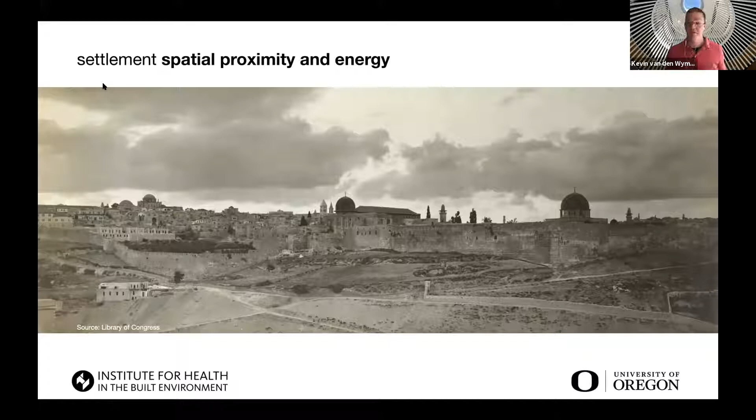And I just also want to do a quick flashback to what I call the 100-year flu. I would say COVID is the 100-year flu, right? We design buildings around 100-year floods, but maybe we need to start thinking about designing buildings around the 100-year flu.

And while I think we all recognize that it is going to transform architecture, I think the question will be, how long and lasting are those ramifications? And reconfiguring office spaces around 6-foot circles, I think there's a lot more to it than that. And I hope we will learn something from this pandemic. And with the technology and awareness that we have today as compared to 100 years ago, I really hope we'll be leveling up and talking about a new generation, really a new version of a healthy buildings future.

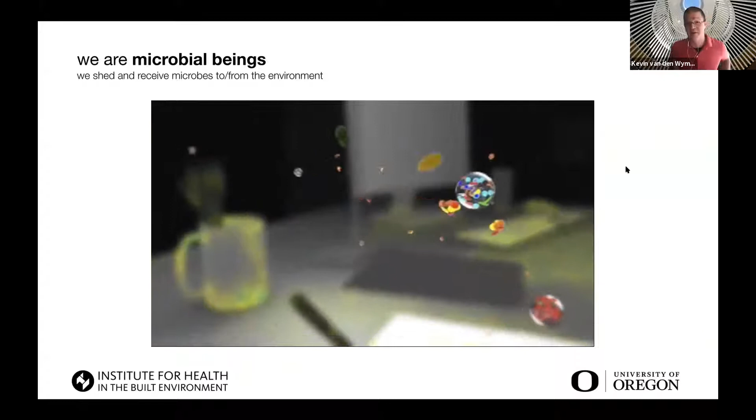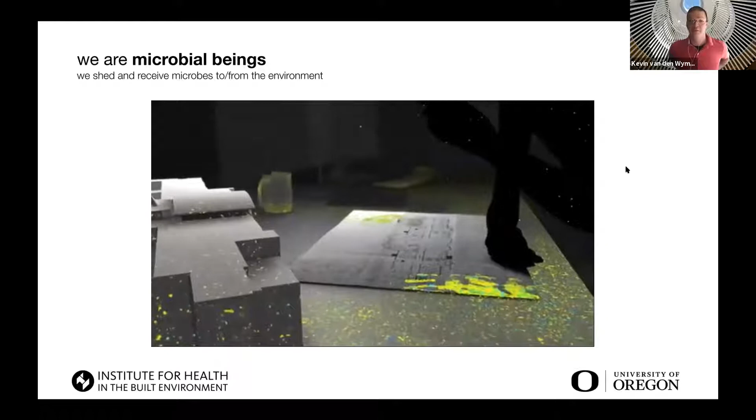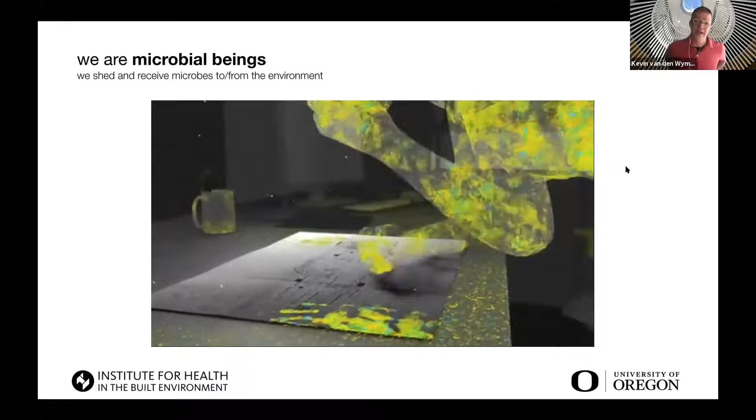So first, just to put this in context, we've been studying microbes in buildings. The center has, for a decade, with the Alfred P. Sloan Foundation. Since I joined the lab 5 years ago, I've also been heavily involved in this indoor microbiome research. You're probably familiar with your gut microbes, and you understand those are often really helpful for you. If you take antibiotics, your doctor might prescribe probiotic yogurts to help replenish them, because they support human health, digestion, and mood. There's a concept called the gut-brain axis, which shows that gut microbes might implicate mood, mental well-being, and recovery from stress events.

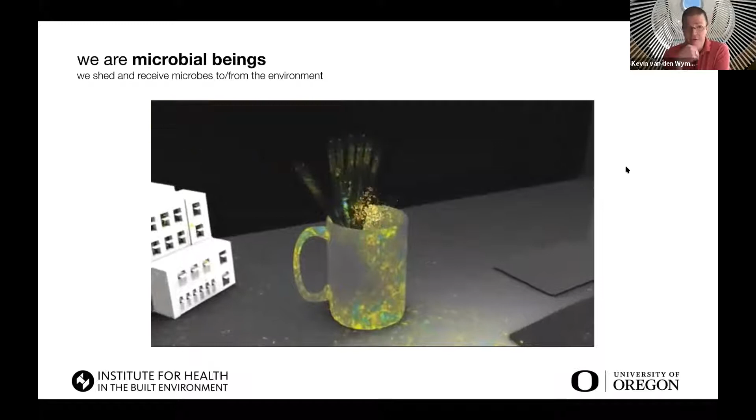The other thing to recognize with these colors smattering everywhere is that we are depositing microbes into the building, and the building is bringing in microbes of its own, depending on its ventilation pathways and the material choices we make when we construct the building in the first place.

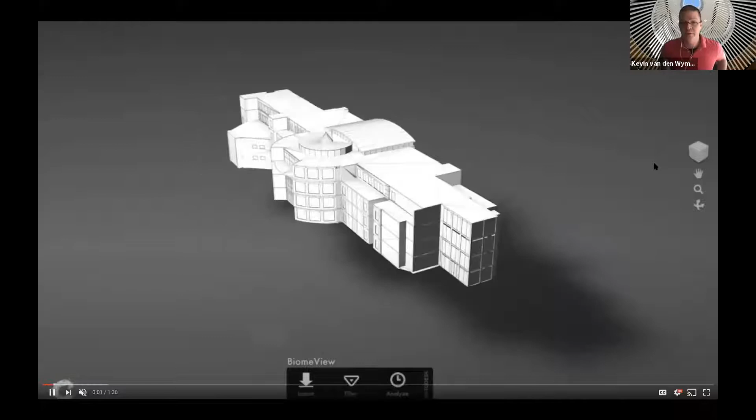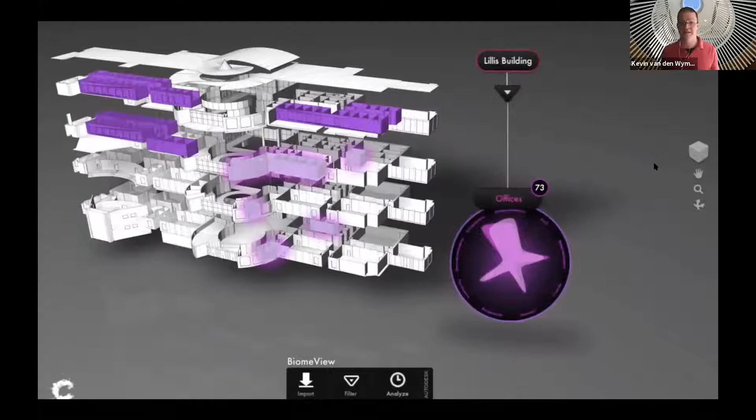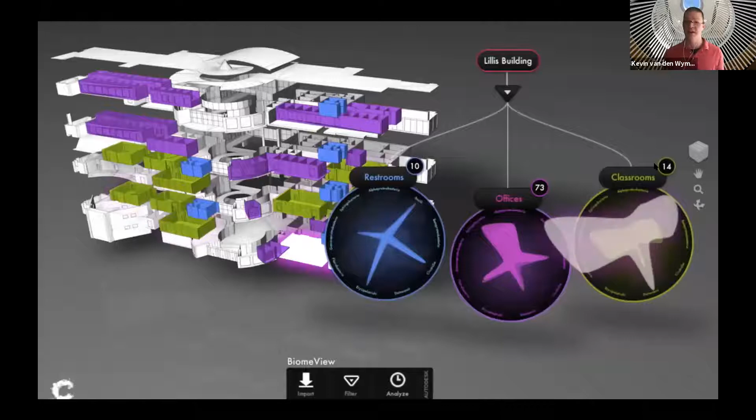What this shows is a research project that completed just as I was coming here to Oregon. Years ago, the Energy Studies Lab worked with local architects SRG on the Lillis Business Complex. It was built in 2002, and the lab had an intimate relationship with it. So not surprisingly, when the opportunity from the Sloan Foundation came to study microbes, we started with this building. We learned that each building type had a distinct microbial signature, and each room type within each building also has a unique microbial signature.

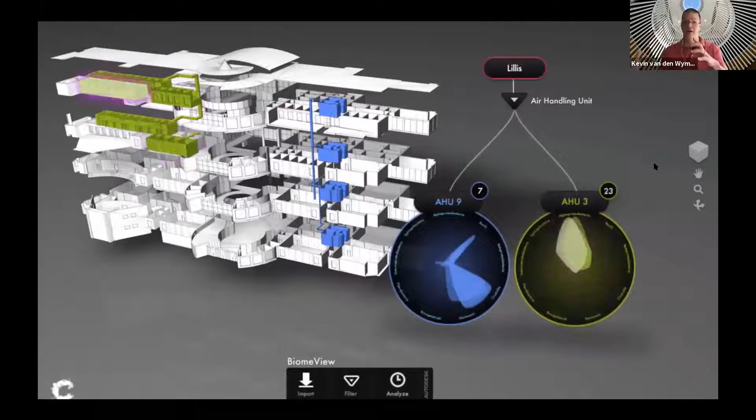These are called spider plots, where we take different taxa of bacteria and plot them around, showing how air handlers from one side of the building have a different microbiome than air handlers from the other side. Offices that are nearer to one another have microbiomes that look more similar than offices that are further away. So you take that to: what can we do from a building operations standpoint?

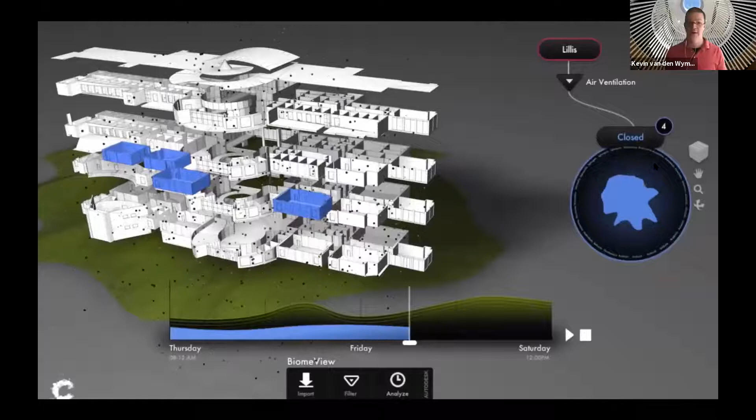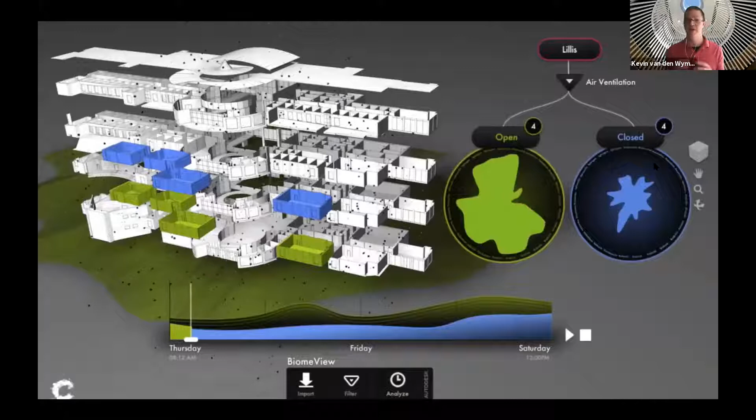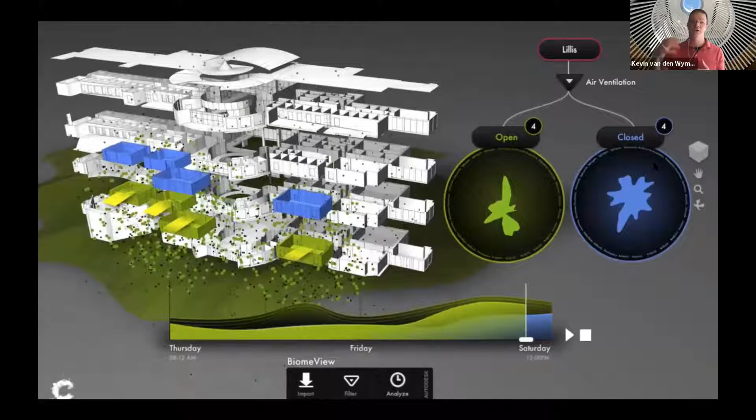Here we're showing that a mechanically ventilated ducted airway, compared to a naturally ventilated, outdoor and night-flushed space, creates really different abundances of microbes, as well as different microbial signatures. The spider plots look different, and the outdoor microbiome had a much greater concentration of outdoor-associated microbes, while the blue spider plot shows a higher concentration of human-associated microbes. That's a clue as to potential pathogenicity of the microbial community structure in those two different rooms.

We don't know why, but I have some hypotheses—maybe it's around the idea that the solution to pollution is dilution, and we're getting more outside air when delivering it through passive ventilation, especially night flush cooling, than in a classroom that has minimum outside air requirements when the room is unoccupied, for example.

Okay, so that's the platform. Enter February 2020 and the novel coronavirus.

We sprang into action and said, look, if the Biology and the Built Environment Center doesn't write a guidance document as quickly as possible, then who will? I'm proud to say that the ASHRAE Epidemic Task Force, as far as I'm aware, reviewed this as the first paper when they were starting their guidance documents. We've had many hours of interesting conversations over the last several months, and it's been a really interesting collaboration to bring architecture, microbiology, building science, and building engineering together to support guidance documents from ASHRAE as well as from AIA.

In this paper we make several recommendations, but three that really stick out and are relevant to this topic today are outside air fraction, air change rate or air exchange rate, and filtration. If you read the ASHRAE Epidemic Task Force guidance, those are three really fundamental principles.

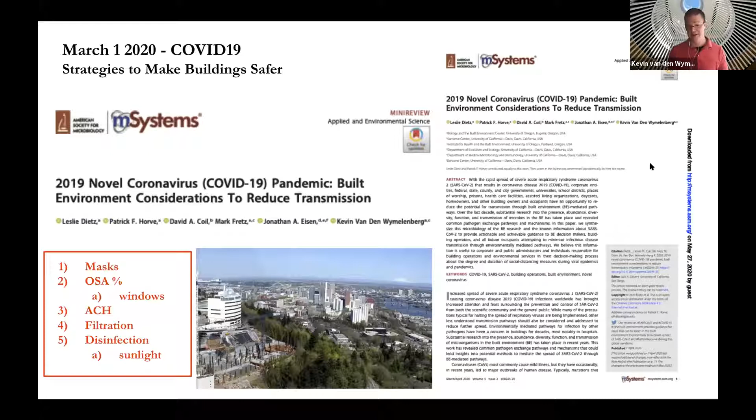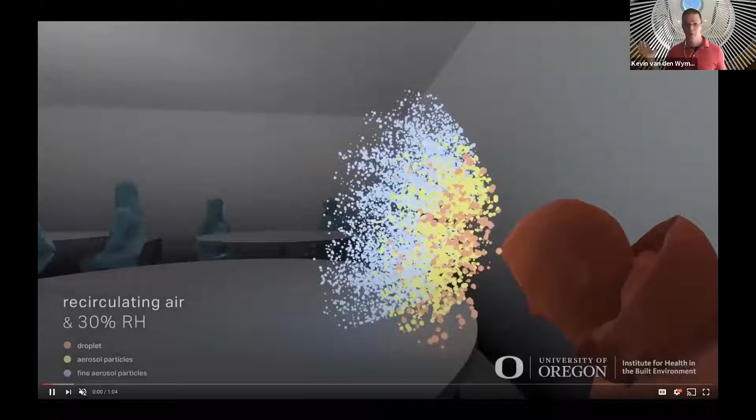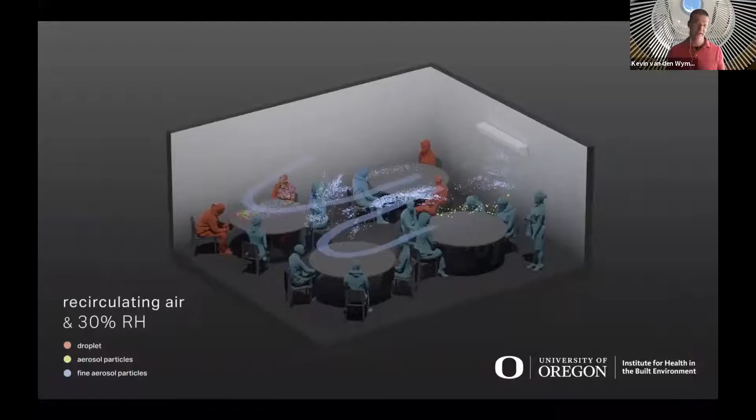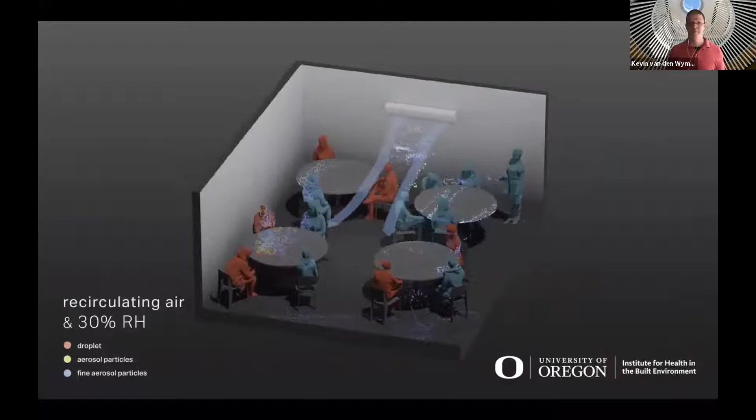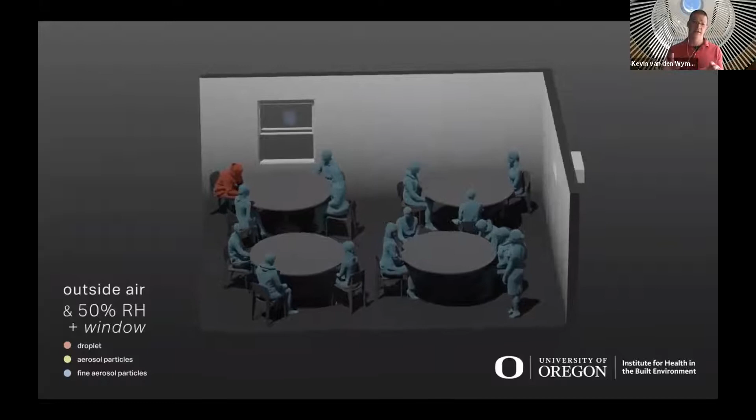We know it can be caught up in globules that are less than 1 micron. Less than 1 micron particles can fly around the air. And there's even research to show that ultrafine particles can remain aerosolized and infectious in a perfect environment for more than 16 hours, for up to and more than 16 hours, right? And so the whole idea with this was just trying to say, look, wherever you come down on that spectrum, from a particle physics standpoint,

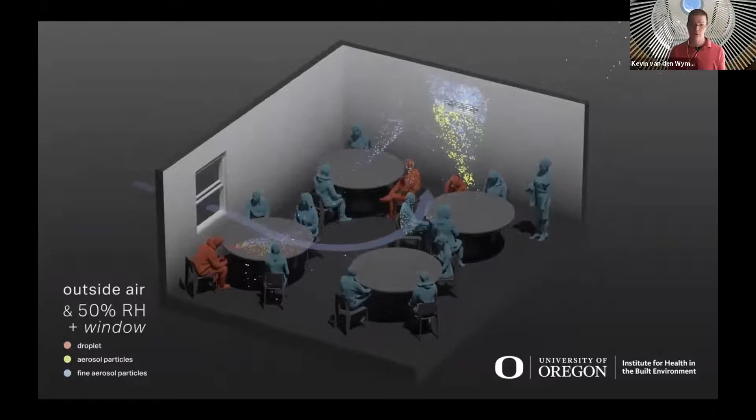it's hard to deny that particles could remain aerosolized for some period of time, get caught up in air streams, and fly more than 6 feet. And that there are things that we can do about it. And here in this case, we're just simply showing 2 simple concepts, maybe 3. Increase outside air exchange, in this case through a window, exhaust air, so once-through air as opposed to recirculation.

And then the third being, when you do introduce outside air, oftentimes, depending on the weather, you might have increased relative humidity. And there's kind of a trifecta related to relative humidity that is pretty interesting.

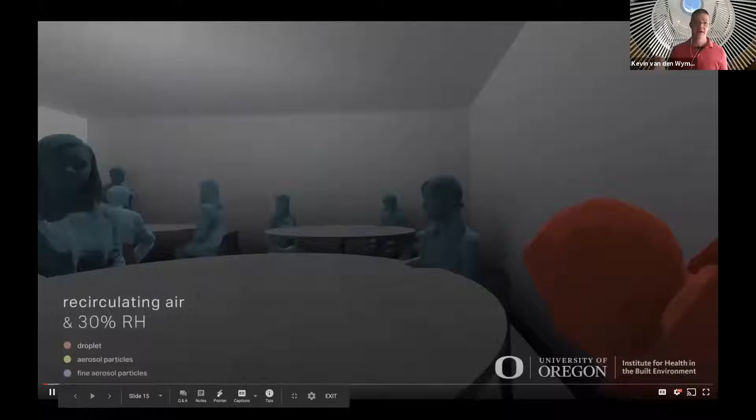One is that increased water content in aerosols means that those aerosols will fall out of the air more quickly. So here you can see the ultrafine aerosols are the blue, and with more humidity, especially those will become heavier and will fall out of the air more quickly, so you're less likely to breathe them in.

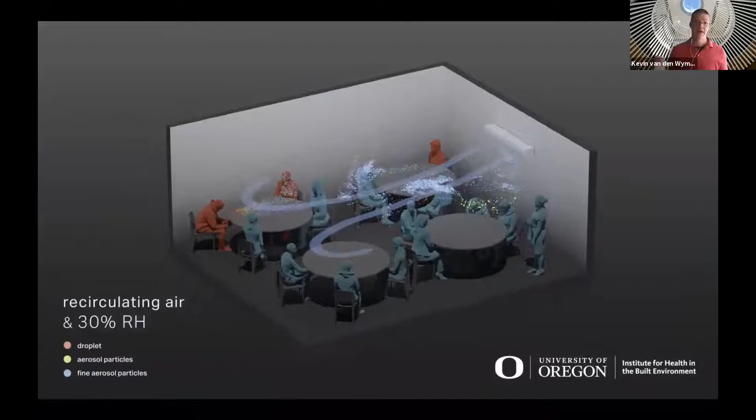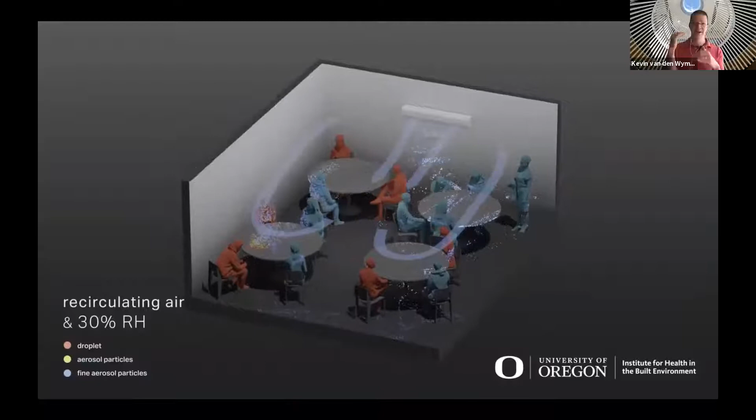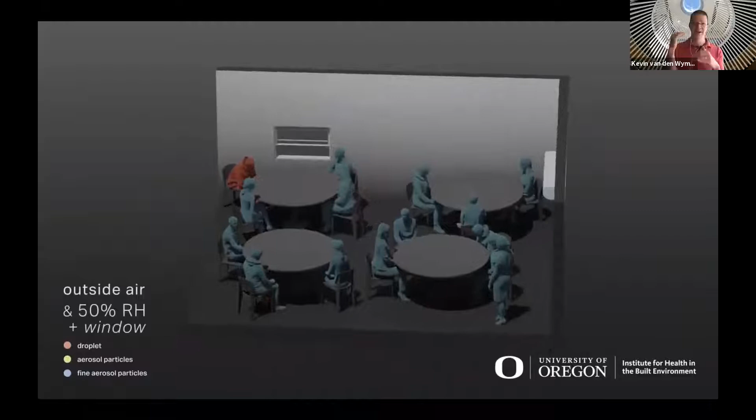The second is that mid-range humidity from 40 to 60% has been shown to be supportive of human immune function. And if you just think of this, if you've gone on an airplane, the air is really, really dry, you come out and your mucous membranes might be cracked and more likely to create structure for a pathogen to take hold, drying out the natural ciliary action that can happen as a natural preventative measure from our immune system.

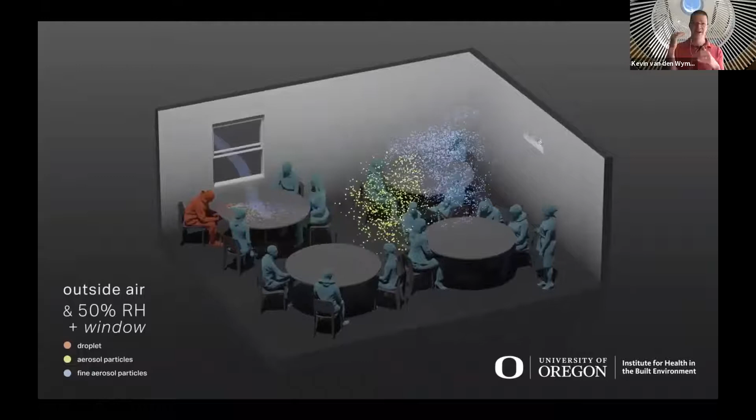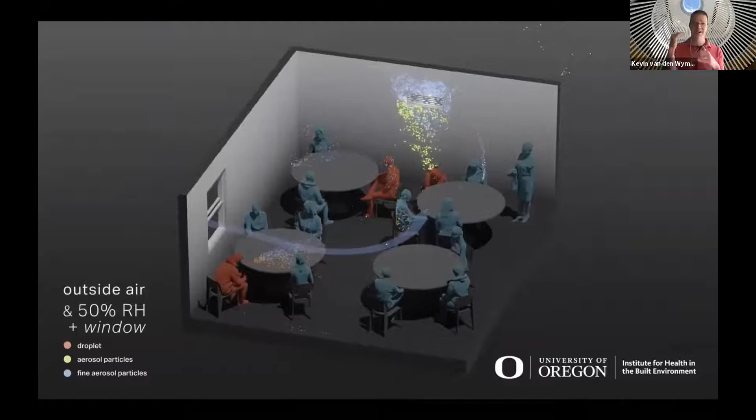And then the third thing in the trifecta would be that increased humidity from 40 to 60% has been shown to more rapidly inactivate virus particles. In particular, there's a lot of research on influenza, but there is some emerging research on the novel coronavirus as well. And in general, it's fairly well accepted that mid-range humidity can more quickly inactivate influenza especially.

Okay, so we've got some problems, but there are some things we can do about them, right?

Well, we want to bring data to that equation. We had been studying with our hospital partner at Oregon Health and Science University for several years before the coronavirus pandemic, looking at other pathogens. Two in particular, two bacteria: one called Pseudomonas aeruginosa and the other called Clostridioides difficile, or C. diff. Most folks have probably heard of C. diff. It's a gut bacteria that causes pretty bad diarrhea, and in its worst case, you can have large sections of your bowels that have to be removed because they become irreparable. It's absolutely dreadful, has long-term consequences if you survive, and it actually kills about 8% of the people who acquire it. So we had been already studying different pathogens in the hospital environment.

Insurance companies often don't make payments associated with what they determine was a hospital-acquired infection. So if they can say they think the patient acquired it within the hospital, they can refuse payment, depending on your provider and your terms, of course.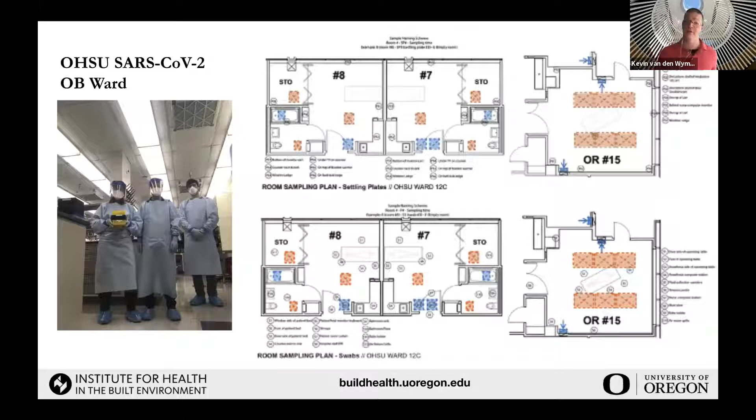So the fact that they were willing to let me, let us, participate and actually fully collaborate in the research is just amazing. And I think this hospital, because they're taking such a proactive approach in testing their spaces for the presence of this genetic material associated with this virus, is likely the safest hospital, or one of the safest hospitals to go to.

So really the surface swab is a time-integrated signal of anything that might have deposited in that space since the last time that surface had been wiped or cleaned. And the dish is a known shorter period of time, usually just an hour or two, as we're walking around putting dishes out into multiple rooms, and then coming back an hour or two later to collect them.

And here you can see this particular room had two locations that showed the presence of the virus. I want to take a moment to explain that. So the presence of the virus—what I really should say is the presence of the genetic material, or very specifically the RNA. If you're used to hearing DNA, it's a similar concept; it's just that this particular virus is an RNA virus. So we're using that genetic signal to detect the presence of the virus.

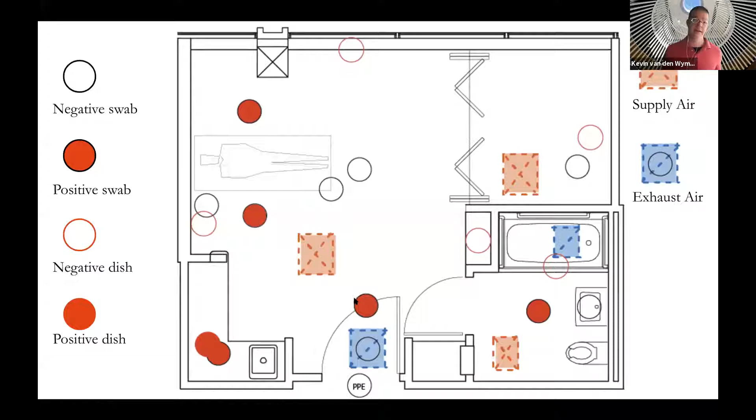And then finally, the operating room. And here, this is sort of the cleanest of the clean, if you will. 20 to 25 air changes per hour, MERV 15 filtration. And this part of the year was quite mild. Studies were collected in April, quite mild outdoors in Portland, and we had a really high outside air fraction. So kind of the best of the best of the best. Higher than even ASHRAE recommendations for hospital settings and the new ASHRAE Epidemic Task Force guidance, which is recommending MERV 13 for commercial buildings if possible.

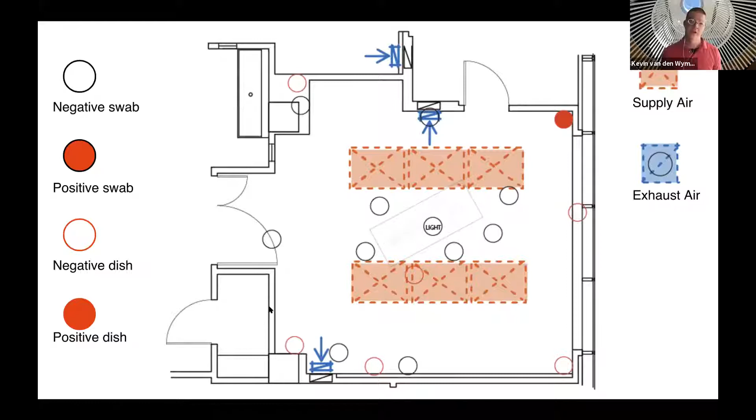So the fact that we saw at least the genetic material in the dust that settled into the Petri dish in this room in particular started us asking some pretty tough questions about the possible transmission routes through air handlers. And therefore we ran this study, and this is available as a preprint. The 3 slides I just showed you are not yet published anywhere, but these slides are. And this preprint is available on medRxiv, and it's going through peer review right now. I can explain to you why we decided to issue it as a preprint, but basically the short version is we thought it could be helpful for society.

It was really exciting to see that the journal editor actually immediately forwarded it to the WHO even before it went out for peer review. So that was for us a pretty good indication of their confidence in the data as well as their belief in the importance of the work. So what we show here are 3 air handlers that we tested at the same hospital: air handler 1, 5, and 10. And you see that 4, 5, and 6 are ganged together, and 9 and 10 are ganged together, whereas AHU1 operates independently. All 3 of those locations, at one point during the pandemic, had a COVID positive individual on the floors they serve. And all 3 of the air handlers had at least the relic or the genetic material associated with the virus.

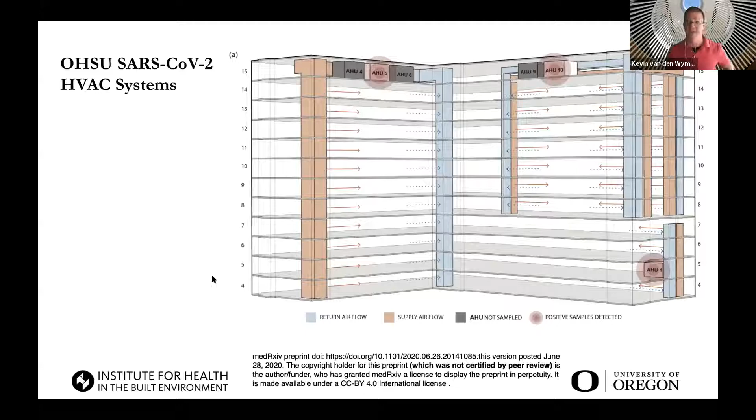It was the first paper, to our knowledge, that shows this result. And if anybody has seen any other research that's similar to this, please do forward it along, as we're trying to stay on top of these kind of things as much as we can.

And this is a zoom in to each air handler location that we sampled. So we sampled 3 locations in each air handler, and we sampled 3 spots at each location. So you can see we sampled at the pre-filters, and we sampled in 3 spots. At the final filters, which is a MERV 15 filter, at 3 locations. And then after the final filter, at the supply air damper, also in 3 locations. Again, across 3 air handlers.

All 3 of the locations at all 3 of the air handlers had some positive samples. And in total, all positive samples represented about 25% of all the sampling locations. So 25% of the sampling locations came back positive, but all 3 air handlers at all 3 locations within each air handler had some positive samples.

And so just pause there for a second. It was actually really interesting, because that correlated fairly strongly with the degree of positive samples from the floor level or the ward level sampling locations. And for me, that meant, wow, we could use the air handler as a rough order of magnitude surveillance strategy for the possible presence of the virus within any of the locations in the building that is served by that air handler. Basically testing that exhaust airstream, right, or the return airstream.

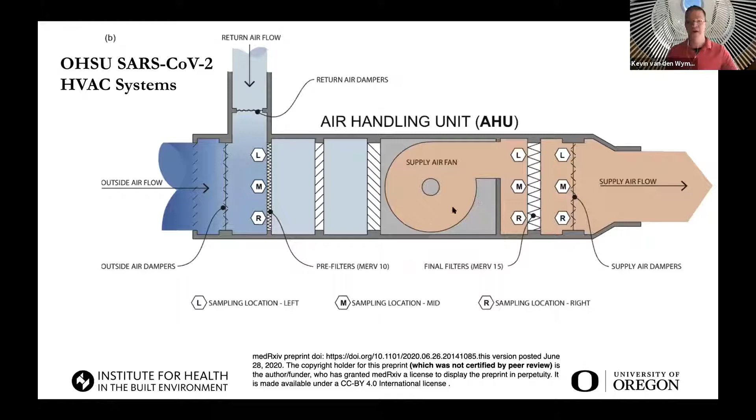The other thing, of course, that this suggested is the possible risk associated with airborne transmission routes or aerosol transmission routes, even and including through air handlers. So if you look at the genetic material that we collected from each of those 3 locations, this is gene copies per sampling location. And you see a high, low, high happening here. And there's lots of hypotheses that I can draw from that result.

Nothing can be absolutely conclusive because, again, what really matters is: is there an infectious virion or virus particle making its way through and impacting upon the supply air damper? We don't know that yet. We're actively working on that to determine the potential for viable virions, virus particles moving through airstreams. But we can say there was a high, low, high pattern on the pre, final, and supply air. And that suggests that we should do additional research.

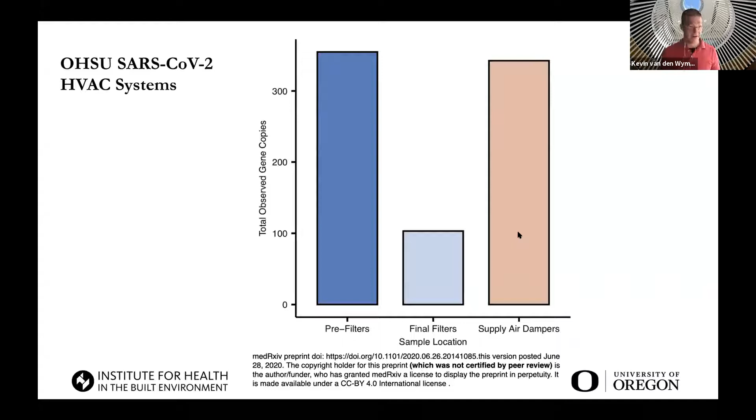Ken, I see your question about UV filtration, and I'll get to that one.

Okay, so where are we headed? All of that was to say we've done some of our homework. We're learning about how microbes in general and this coronavirus specifically is moving through airstreams or moving through buildings. And what are we going to do about that? So I started off with saying, look, coronavirus is sort of putting the target on energy efficiency and saying it's going to be hard to hit our energy efficiency targets if the big strategies related to reoccupying buildings are all about increasing energy consumption.

And while that may be true, and those strategies may be important to implement for some period of time, first, we have to be careful that it doesn't become the new normal. And second, in order for it to not become the new normal, we need to apply it strategically. We need to apply it with data. We need to use a data-driven strategy to say, look, we need to increase outside air change right now, or we need to increase outside air fraction right now, or we need to reduce occupant density in our building right now, but not necessarily tomorrow or the next day.

And we want to be able to add that as another data stream to our building automation systems, as well as our Office 365, building environmental, spatial, and human resources equation. Because if the answer is just use more energy, we're going to pay a price, both in our cost of energy as well as the potential for increased particulate matter. And interestingly, increased particulate matter exposure in certain populations is showing increased susceptibility to things like coronavirus. So it's a vicious cycle we want to make sure we can avoid.

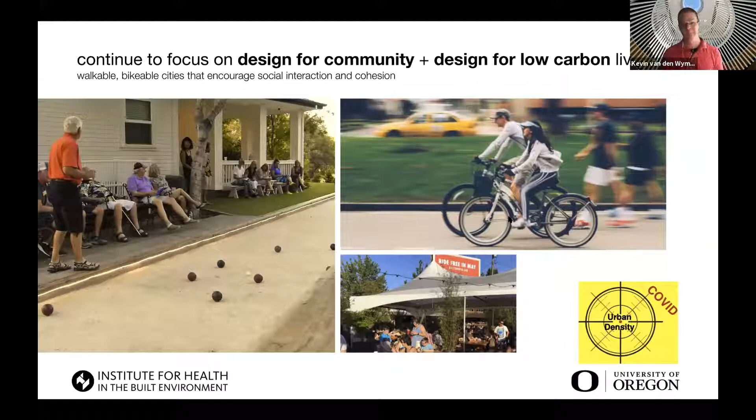So I'm proposing that the solution to these problems is look for the synergies between health and energy. While acknowledging that we may need to spend more energy for short periods of time, let's make sure that's an acute and isolated treatment and not a new normal. And let's make the new normal all about promoting environments that are sort of holistically supportive of human health and human immune function.

And what I love when you start shifting the thinking that way is it means you can start thinking about some of our old tried and true strategies that are actually also energy efficient if we do them well, such as access to daylight, access to fresh air through windows, or passive ventilation, night flush, economizer modes. Like, yes, maybe we need to purge our buildings, but let's make sure we are taking the viral signal as a guide to purge, and that we can really ratchet up, especially during night, economizer modes when our summer nights in Boise are cool enough, those kind of things.

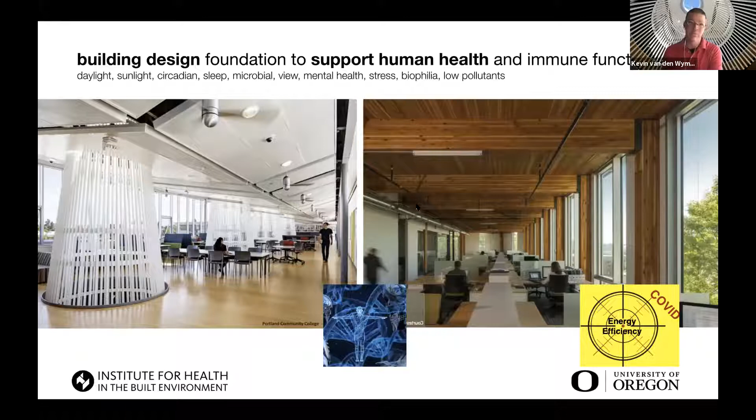So I'm going to unpack a couple of things in 3 categories, and I'm going to do it really quick because I want to get to Q&A. One is daylight, one is IAQ, and one is, generally speaking, control.

So we know that daylight can inactivate a virus. We've known it for a long time. We've known it can inactivate bacteria for over 100 years. And there's a lot of research on UVC. And we're collaborating with a BSL-3 lab that's doing research on UVC disinfection. And their research, not yet published, is showing a pretty rapid inactivation. And that's UVC. UVA and UVB, there's also research out by Paul Dabisch, if you look that up, D-A-B-I-S-C-H, that shows UVA and UVB also more rapidly inactivate the virus. So there's some hope there, I'd say, that strategy could be effective.

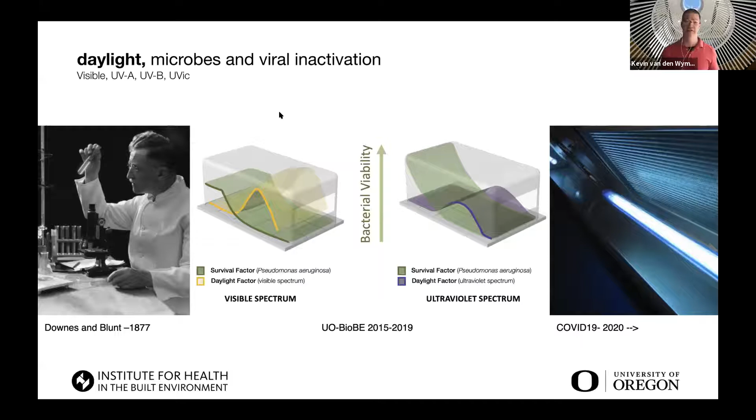Then there's the whole like daylighting is good. And many of you have heard me talk forever about how good daylighting is, right? Supports health, supports human circadian rhythm, which supports sleep, improves mood, improves digestion, improves alertness, and all these many attributes that can also, as a whole, support human immune function. How can we get more daylight into our buildings without the glare?

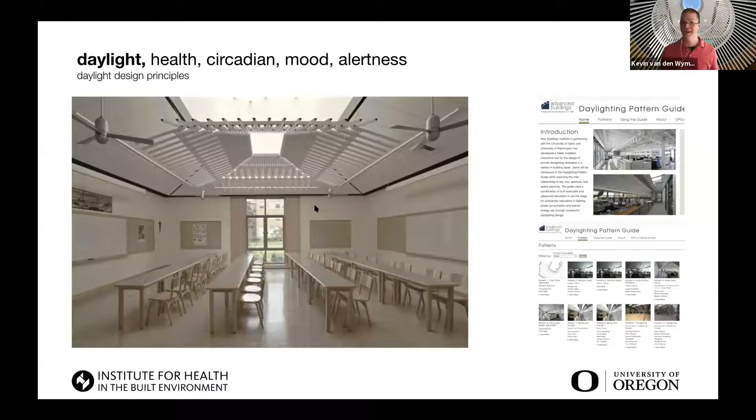This is our first spin-off company. I'm really proud to say that some of our students have spun off this company called Task Shade, and they're building micro glare protective devices that are allowing more sunlight, more daylight harvesting without the glare, and potentially more circadian dose and more microbial inactivation.

Then you've got IAQ, and this is a big one. So I've already explained ASHRAE guidelines about outside air fraction, air exchange rate, and filtration. Here's one that also does an interplay with energy efficiency, and that is an old strategy, 10, 20 years old. We've talked about this, splitting your heating and cooling from your ventilation system and being able to drive each as needed.

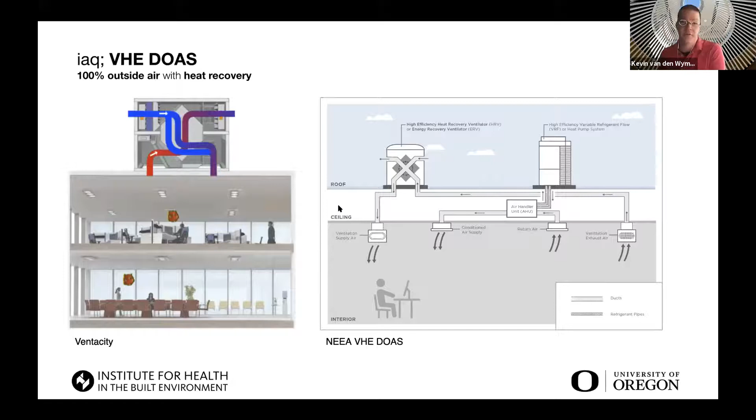And so with a dedicated outside air system, even with heat recovery as shown here, you can do this in new construction or retrofits, where you take over the ductwork in a retrofit or use ductwork in a new construction project for the fresh air component, and you use independent heating and cooling systems, whether that's through radiant slabs like our friends at CSHQA, or mini split ductless heat pumps, a lot of different strategies. And so you can drive each of those independently. And then here, even at the more micro resolution scale, thinking about personalized airspaces. So each room potentially could have mini heat recovery right at the window.

And these are two products that are pretty well established in Europe, one by Siegenia and one by Schüco, that have basically micro ventilation and micro heat recovery built into window units. Similar concept with Velux that has operable skylights that also admit daylight.

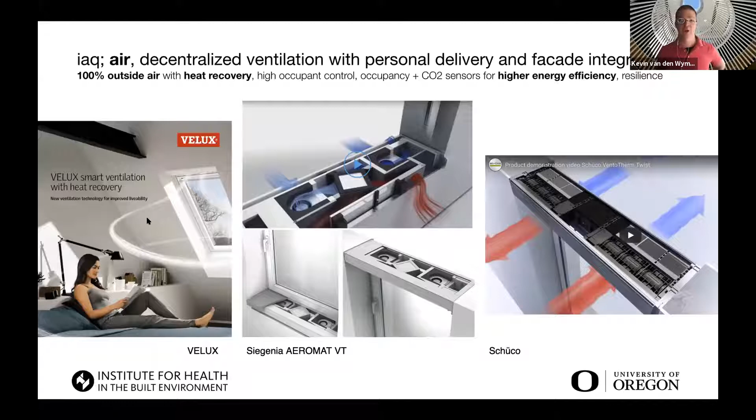All right, so this is a little more bleeding edge, but inside of these trays that our PhD student is working on, he's growing a micro fern called Azolla. And Azolla is a really good carbon dioxide consumer, and of course emits oxygen. And so we were thinking about this pre-pandemic to create clean air spaces during wildfire smoke, but I'd say the same concept can apply to creating isolated micro airspace environments where you're less likely to share air with other individuals. And that could be done through traditional filtration.

I'm just really intrigued with the multiplicity of biophilia, CO2 sequestration, capture, biochar, as well as the humidification, and even perhaps intermittent UV treatment associated with some modules that could be used to grow these Azolla. We're actually thinking like a microeconomy even around this life cycle.

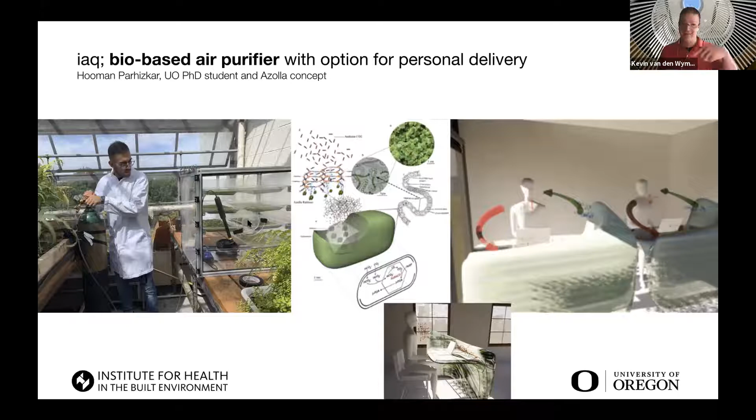And then finally, control, big data. Right now, we're doing data overload even in our current building automation systems. We've been working, even 10 years ago, with Idaho National Lab on the targeted energy management system tool set, basically looking for ways to use the data that our buildings are already collecting more intentionally, more meaningfully, with greater impact. And I'd say the added layer of health data and occupant data can bring that, in particular in this pandemic, to a whole other level.

For example, luminaire level lighting controls have a whole distributed mesh network of sensors that are right now disassociated from the building automation systems that are operating our HVAC. And those two data streams could definitely do their job better together, but we need to work out the interoperability. Imagine a scenario where demand control ventilation, which is currently implemented using CO2 sensors, could instead be implemented using this distributed mesh network of occupancy sensors.

CO2 sensors drift over time, they're known to fail, and they're laggy, right? Because they wait for you to exhale and wait for that air to go up into a duct and get sensed at some sensor some distance away. And it waits for the CO2 in the room to build up to the point where it's uncomfortable, muggy, sticky, and then the sensor's like, oh, I need to provide more fresh air. By that time, the meeting's over, everyone's gone. What if you could use a luminaire level lighting control signal that's real time and deliver the fresh air immediately?

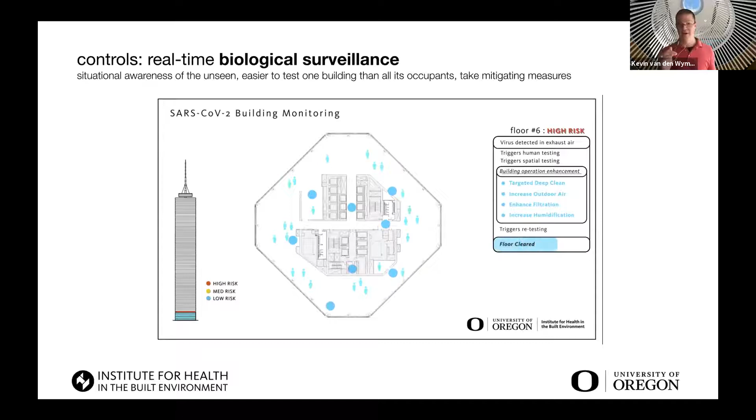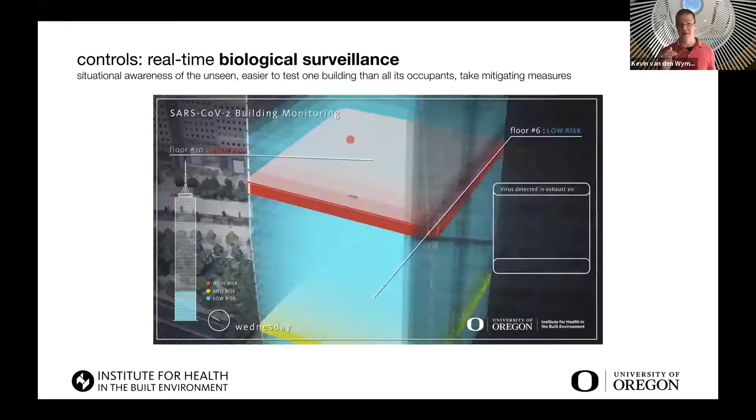And what I'm really confident in is that we can detect a relatively low signal of the genetic material, the presence of a virus. And with that, over time, if we're testing maybe once a day or 2 or 3 times a week, if we see a spike in signal, then we can use that data stream to better target our intervention strategies or even our human testing.

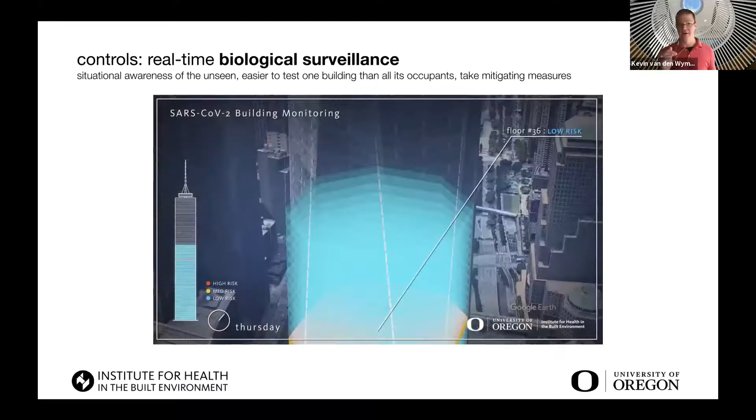And I believe it's the way to thread the needle, get our buildings reopened, restore our economy, and do the both and. I don't care where we fall in the political debate. I'd say everybody wants to be able to reoccupy our buildings and restart our economy. And I think this is the key to do it. And I believe it's bipartisan in nature, so it has a chance to make it through.

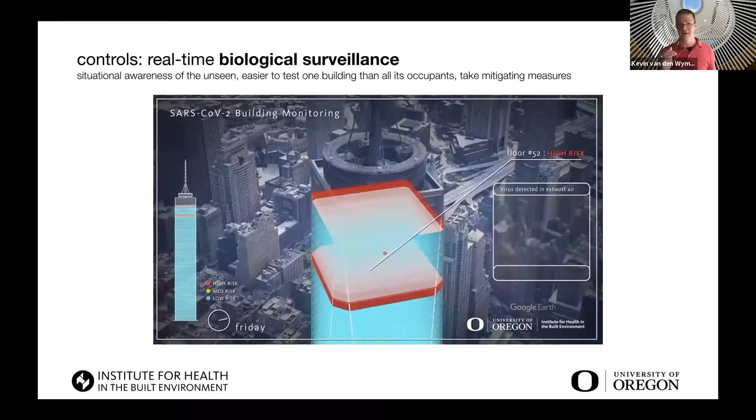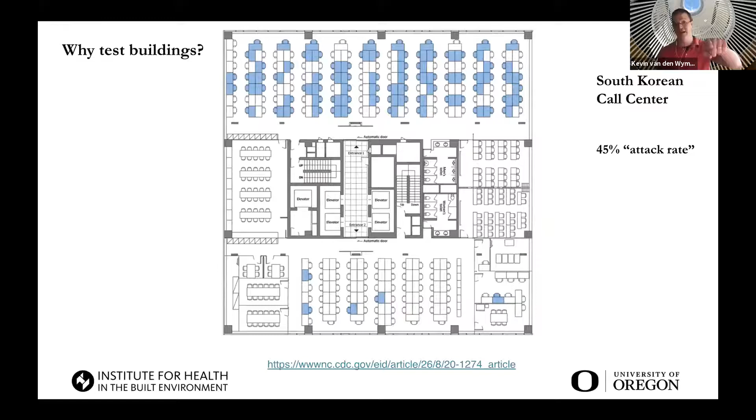Last 2 slides. This is why I believe we can do it and why I think it's so important. The South Korean call center showed a 45% attack rate. Here is the retroactive contact tracing of that building.

45% of the people on that floor got sick. And we could have seen in the building on the floor below, the 10th floor, where most of the people got sick on the 11th, as much as 20-some-odd days before the big spike, we could have potentially spotted that person or the person on February 25th or the group of people on February 28th.

And if we could have identified any one of those and either taken the extreme measure to vacate the building or probably taken a less extreme measure, increased outside air change, increased filtration, increased air exchange rate, do targeted isolation, shut down maybe floor 10 for 2 days, have everybody go get contact tested or whatnot, a whole panoply of potential mitigation strategies, I really do believe we could have avoided that outbreak.

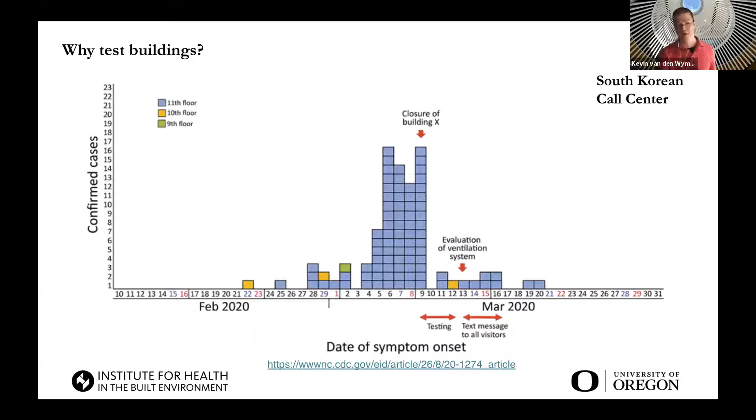And if we could have been sniffing buildings before coronavirus for pathogens like coronavirus, I think we could have avoided the pandemic, at least minimized its impact, and avoided or minimized the impact of the shutdowns. So you guys have all heard me say this before. This is the new integrated design. I love the Integrated Design Lab name. I think it's going to stand the test of time. It'd be a great name for a long time. And it's because we keep reimagining what integrated design means.

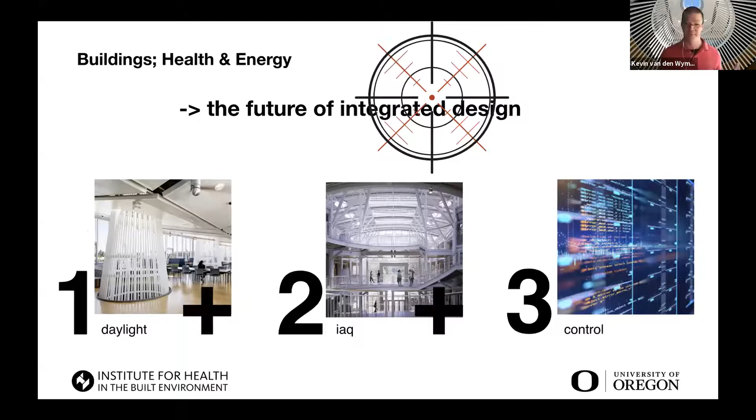Thank you, Kevin. Just like I thought, that was even more information than yesterday, or good supplemental information. Thank you. I just talked faster. I see. Well, I would like to see someone on the chat. Let's see here. You had a question. Yeah. Ken, did I answer your question well enough there? Ken Gallegos? Yeah, I think so.

We just had an owner that was asking about things they can implement in their building that's under construction right now to help mitigate. And it looked like there were a couple cassettes in the air handler unit that could easily be retrofitted to slide a UV filter in there and just add another layer of protection, not 100%, but something else that will work. Yeah, I think it is another layer, and that's what we need. And in an ideal world, that would be driven with a data stream about whether you need to use it as opposed to just blasting forever.

And there are some potential negative consequences associated with long-term use of any of these disinfection strategies, whether it's UVC or chemical disinfectants, et cetera. And that is, there's a reason it works, and that's because the pathogen, whatever it might be, has not seen it before. And the more times you reintroduce it, there's this potential for resistance.